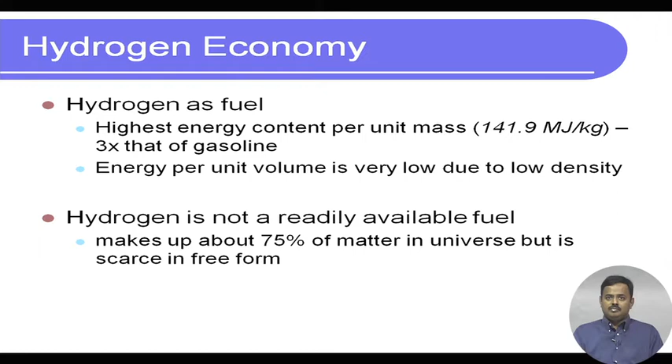All right. So with that introduction, let us look at the history of hydrogen economy. I will start with a first vision, which is a little philosophical. Jules Verne, in his science fiction adventure called Mysterious Island, says that water will be the coal of the future. So the first vision of looking at hydrogen is probably embedded in this statement, and what Jules Verne thought about when he wrote this, we do not know.

But then the discovery. This was just a vision, an imagination that he had; it's science fiction, right. But the discovery: Sir William Grove first demonstrated the fuel cell operating principle way back in 1839, and also independently around the same time Schönbein demonstrated it. So remember 1839, okay, very many years back.

So Haldane predicted the production and storage. Haldane predicted that hydrogen derived from wind power via electrolysis, liquefied and stored, will be the fuel of the future. So you use wind power, the electricity generated in wind turbines, for electrolysis of water, and then you liquefy the hydrogen, pressurizing it, and store it, and you can use it as a fuel. What is the cost of generating that fuel? Of course, that probably is going to be high. We will come to that.

Application and transport. Lawaczeck outlined the concept of hydrogen powered vehicles in the 1920s. So you can see the isolated inventions, discoveries and findings date back a long way, to the 1800s, 1920s and so on. He was the first person to suggest that hydrogen could be transported via pipelines, similar to natural gas. His vision was just like we go to a gas station or a petrol pump, where petrol or diesel is transported by pipelines or trucks, hydrogen in future could be transported via pipelines similar to natural gas. Okay.

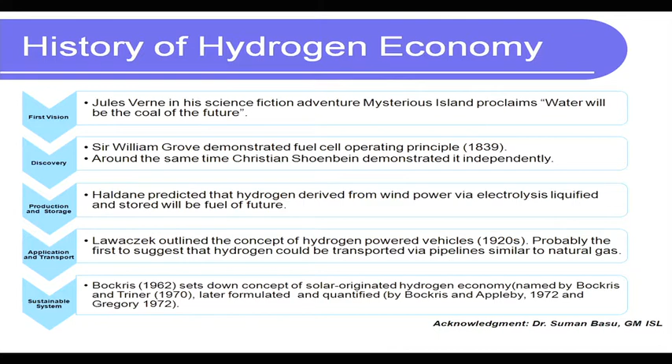And then the sustainable system, here are a few statements about that. I am not going to go through them; you can just read it. So this is a snapshot of the hydrogen economy.

So hydrogen production, how do we produce hydrogen? As we say, hydrogen is not available; we have to produce it first. Present methods of hydrogen production are few. Steam reforming of natural gas: in chemical energy storage, from methane we were able to get hydrogen as a product, methanation and reformation. Biomass gasification, steam reformation of bio oil, then partial oxidation of hydrocarbons, with hydrogen, carbon monoxide, carbon dioxide and water vapor as products. Coal gasification. These are used today, but the cost of producing hydrogen as a source of energy using any of these methods is pretty high.

For 1 gigajoule, which is not a very high number, the cost is $6 to $15 using any of these. These values may change as the processes change with time, but suffice to say that this is pretty high. 1 gigajoule is actually less than 1 megawatt hour. And this is just the cost of producing that source of energy, and then you use this hydrogen as a fuel to generate energy, which again will have its own cost.

And remember that the cost of mining coal, or digging into reservoirs and getting natural gas out, is much lower compared to this. And with electrolysis of water, you are using electrical energy to produce hydrogen, which we then use to eventually produce electrical energy. So it's a roundabout situation where electricity is used to produce electricity, and of course there will be losses in the processes. The cost there is almost $20 per gigajoule. So they are definitely very costly today compared to the other sources of energy we have.

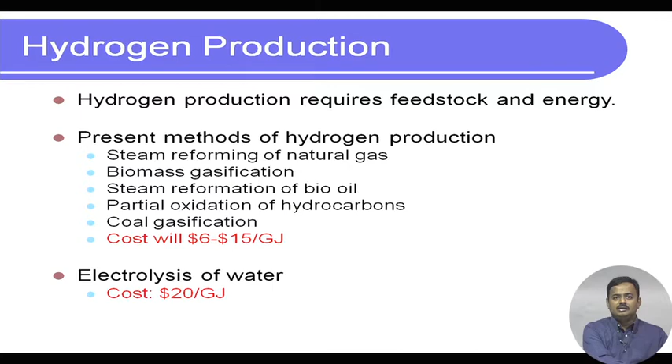So, the challenges for hydrogen as fuel: generation is definitely one. The second is storage, because it is a large volume for a given mass. Some methods being thought of: compressed gas storage in underground tanks. Remember, with compressed air energy storage, we said it competes with storage of liquefied or compressed hydrogen, as well as LNG, liquefied natural gas. Compressed storage and transportation in pipelines, typically as compressed gas or liquid. Liquid hydrogen is an energy intensive process and transport is hazardous, because hydrogen is a highly combustible fuel. Next one is metal hydrides. This actually is good.

What is happening is, these are some metals which sort of absorb this gas at room temperature and release it on slow heating. When you elevate the temperature a little bit, the hydrogen will be released. But the issue is, those elements are platinum, palladium, which are extremely expensive.

Okay. Right now, some rare earth metals and some other rare earth elements are also being looked upon for absorbing hydrogen at room temperature and releasing on heating. So, that is one topic under research. And finally, glass microspheres. This is also a very attractive and very nice technology that is again under evaluation. So, glass microspheres, okay, these are doped glass microspheres which are used to store and release hydrogen.

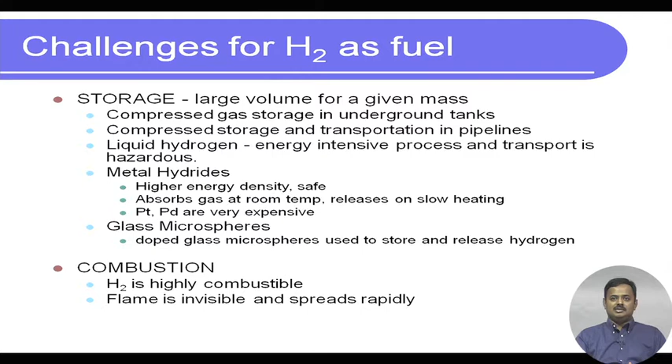Okay. And the other issue is, when it burns, the flame is invisible and it spreads rapidly, because it is very light, right. The density is so low that it will spread. So, that is a problem. Okay. So, we need to keep it in mind. I mean, just because something is hazardous if it is combusted should not stop us from looking at it as a good source of energy. Okay. But we have to be careful with any fuel.

So, that is what I come to in the next slide, the safety of hydrogen fuel. Hydrogen could be unsafe if handled improperly, because it is highly inflammable with invisible flames, which is what we are talking about, but that is true for any gas, or even for any other energy source. With petrol and diesel, we see those trucks, we see that it is highly inflammable, right. So, we have to take good care and we have to be careful.

The problem is, there are historically two incidents that have severely tainted the reputation of hydrogen as a safe fuel. The first one is a very tragic accident called the Hindenburg incident in 1937. Okay. So, Hindenburg, in those days, I mean, right now we see these jet planes. In those days, there were also these things called airships. So, airships, there was one called Zeppelin.

So, airships typically used to have these compressed hydrogen tanks inside, and then there was a large metal frame, and then there was a fabric around it. So, that used to be the aircraft, and of course, it did not fly at very high speeds like the jet planes of today, but you could use it. I mean, that was pretty regularly used for flights.

Okay. The Hindenburg incident, where the airship, the Zeppelin, caught fire and that led to loss of 36 lives, is a very landmark incident because it forever changed the face of the aviation industry. After this incident, airships were never used again, and we went on to the jet planes that we use for flying today. Okay.

However, that being said, there are several theories that go around the Hindenburg incident as to why the explosion took place, why the plane caught fire, and there is no conclusive proof that the accident happened because of combustion of hydrogen, and that was a trigger. There are lots of theories. The plane belonged to Germany. So, there are several conspiracy theories, sabotage theories, etc. So, I do not want to get into that, but I will show you a video, because this is a very historic incident. So, we should know about it.

The other thing is the hydrogen bomb. Okay. Now, let me be very clear, apart from just sharing part of the name, the hydrogen bomb and hydrogen as an energy source have nothing in common. Okay. The hydrogen bomb has nothing to do with hydrogen as an energy source. It is just like saying, we know that the atomic bomb, nuclear bomb, of course they are there, but does it mean that anything related to nuclear energy is bad? No, right. Okay. It is like any other fuel also.

I mean, coal or natural gas can be used to generate electricity. Petrol and diesel can be used to move our cars or trains, for transport, or moving vehicles. Okay. But both of these can be used for arson. So, if you misuse anything, of course that is there. So, the hydrogen bomb and hydrogen as an energy source have nothing in common.

All right. Okay. What I will do is I will just deviate a little bit now and show you a small video of the very tragic incident of Hindenburg. It is a short video. This is a Zeppelin aircraft.

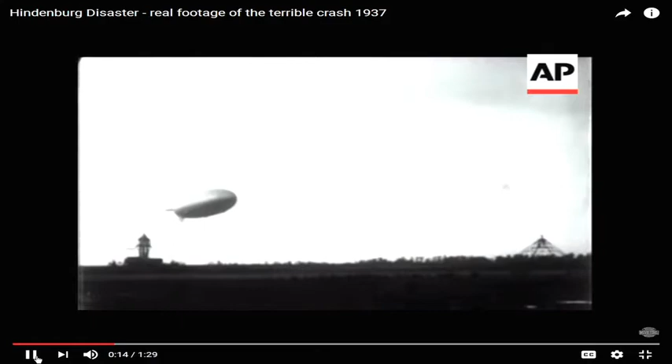Nearing the fatal end of her first Atlantic trip of the season, the Hindenburg approaches the mooring mast at Lakehurst. 21 of these sky voyages the world's biggest dirigible has made, so safely, so surely that the experimental service has become a matter of routine. Scarcely 100 feet above ground, the giant airship, with her framework encasing 7 million cubic feet of inflammable gas, is being carefully maneuvered towards her hangar, when suddenly

appalling tragedy is a matter of seconds. It seems almost incredible that anyone should escape, yet 2/3 of those on board survive what is, next to the R-101 disaster, the worst in the history of aviation.

Okay. So, very tragic incident. As you see, it happened just moments before it was landing in New Jersey. Within minutes 36 lives were lost of passengers and crew together. But that being said, there is also a positive part: more than 2/3 of the lives were saved. Of course 36 loss of lives is tragic, but many people were also saved. And one of the reasons was hydrogen fuel, being light, actually moved up.

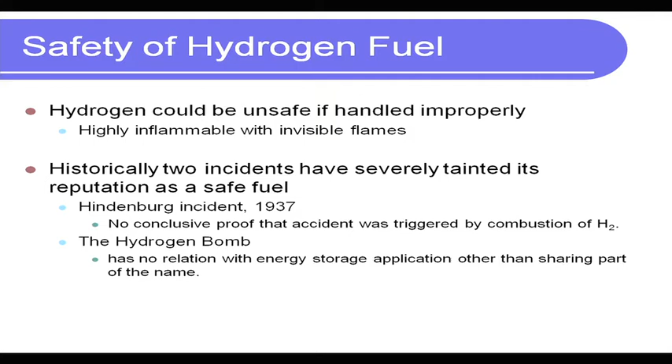So, what we will do next, after this brief discussion on hydrogen economy and hydrogen as fuel, is move into fuel cell. And fuel cell actually uses hydrogen as the fuel to generate electricity. Keep in mind, this is also an electrochemical device like a battery, where chemical energy is converted to electrical energy directly. But a battery can be used to store energy, whereas a fuel cell is direct conversion in real time. There is no storage involved. As long as you supply fuel, you are going to get energy generation.

Unlike a battery, which will supply energy during the discharging cycle, but beyond a point it will discharge, and then we will have to either throw it away if it is single use, like in our torches or clocks or remote controls, or recharge it like we do for our cell phones, laptops, etc. So, we will now move on to fuel cell.

So, what is a fuel cell? A fuel cell uses hydrogen, as I said, as an energy source. A fuel cell consists of electrodes and a catalyst. Any fuel cell, like a battery, has two electrodes and an electrolyte. As we will see later, there is one form of fuel cell called a proton exchange membrane fuel cell, which allows protons to flow through while stopping the movement of electrons. At these electrodes is a catalyst where the hydrogen dissociates into electron and proton.

If you take a monoatomic hydrogen and remove the electron, we are just left with one proton. That proton moves through this proton exchange membrane to the other side of the electrode, where what comes in is air which has oxygen. These protons then, in the presence of the catalyst, react with the oxygen molecules.

Now, what happens to the electrons? When the electrons are separated at this electrode, we attach an external circuit. This electron flows through that external circuit and comes to the other electrode, where it recombines with the proton to produce hydrogen, which then combines with the oxygen to produce water, and what comes out therefore is air minus some oxygen, and water vapor. And it is an exothermic reaction, so you are also going to generate heat.

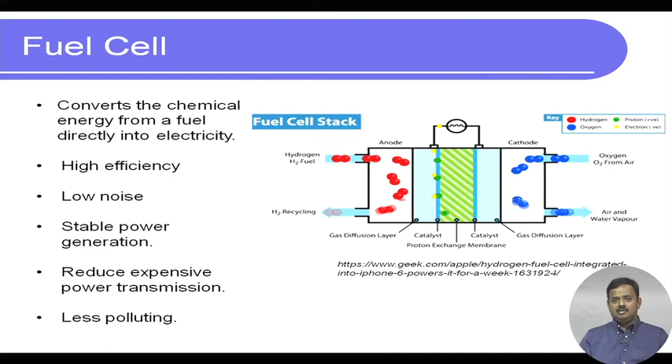So, what is an ideal application for such a fuel cell? One of the ideal applications for such a fuel cell is actually cars. It depends on the temperature, etc., but in cars, especially when we talk about electric cars, we can use a fuel cell as a source of electrical energy, or even in hybrid vehicles, for the electrical part we can use fuel cells.

But of course, there are challenges. Most of the electric vehicles and hybrid vehicles that are commercially available in the market today are driven by batteries. But the fuel cell is an equally strong contender, if we can bring the cost down, bring the size down, make it compact and so on. So, this is, in a nutshell, what a fuel cell is and an application of generation of electricity using hydrogen as a fuel.

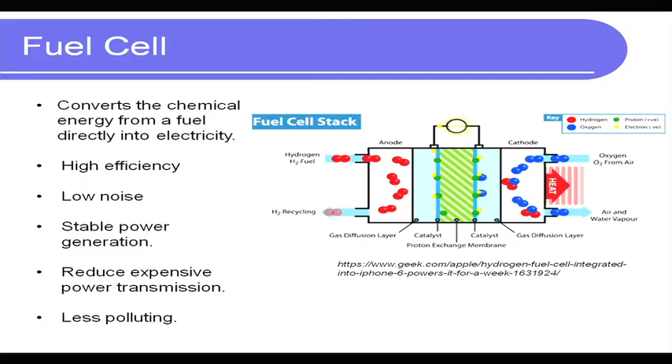So, with that small introduction, we will stop this lecture, and we will continue in the next lecture with further description of the fuel cell. So, let us recap what we discussed in this lecture.

We started by saying that hydrogen is an attractive candidate to be used as fuel. Why? Because its energy content per unit mass, remember calorific value or heating value, is very high, 3 times that of gasoline that we use in cars. So, very attractive, but of course, it is a very light element. So, the volume required for a given mass is much larger compared to any of the other fuels that we use regularly.

But one of the big drawbacks is that hydrogen is not available freely in nature. It is available, probably 75% of matter in the universe contains hydrogen. The biggest source is water. Water is H2O, so hydrogen is available. Natural gas has hydrogen, any of the hydrocarbons have hydrogen, coal has hydrogen. But the thing is, we have to extract the hydrogen from all these sources, and for that we need to use electricity.

And the cost of electricity, or the energy cost involved to just generate hydrogen, is quite high. So, that is a problem. We really have to see that we are incurring additional cost to generate the hydrogen. So, are we going to get the returns, because for a given mass I get a lot more energy?